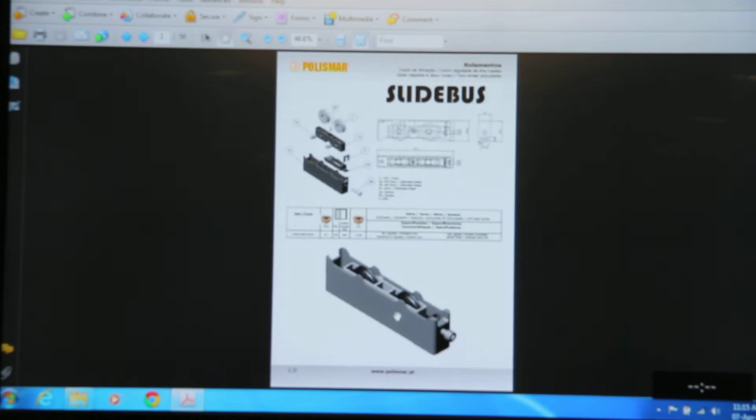Polismar is our supplier of rollers. Here we can see the dismantled roller. This is called the wheels, and this is the case, and this is the case in which this whole arrangement will be fixed.

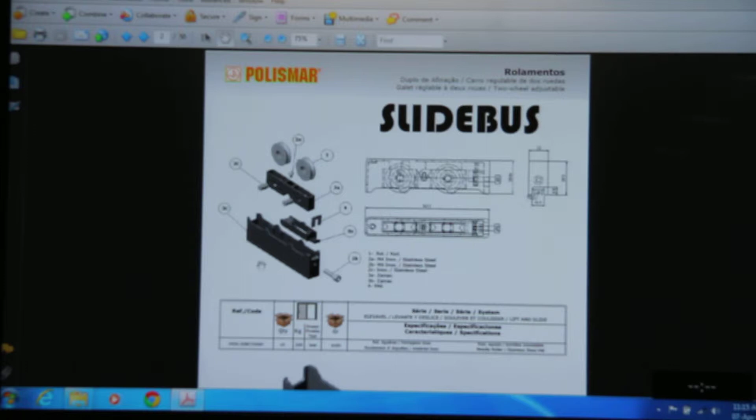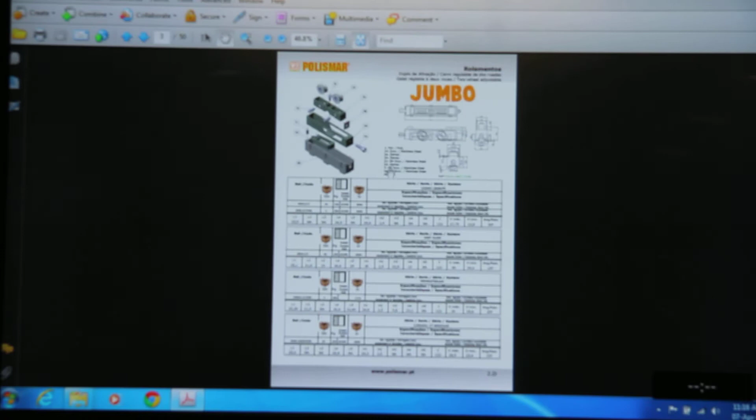Now here we can see the roller. It's a double roller because two wheels are here, so it's called a double roller. When the single wheel is there, we can say that is the single roller. So different types of materials and the specifications are here.

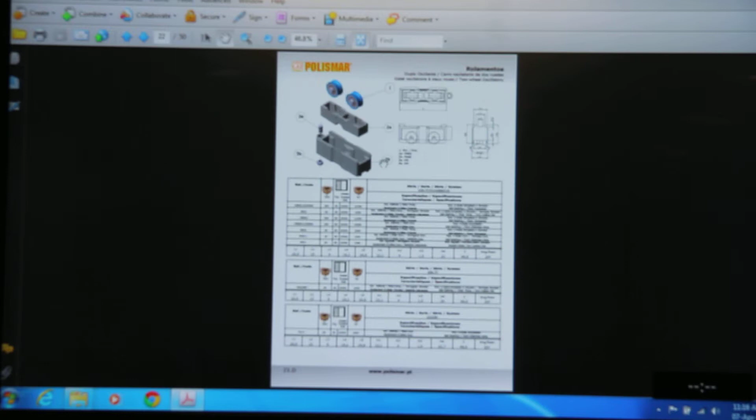Here you can see the single roller. In that only one wheel is there, and it's applicable in the sliding windows especially, and for the doors we are using the double rollers. So now let's see how we decide the roller for the specific sliding door and window.

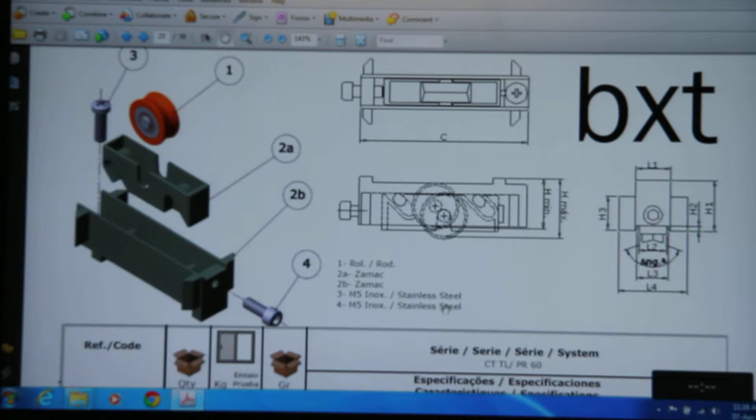This is our roller code. It depends upon the profile, which kind of profile we are using for the sliding. It shows the profile digits, and this is the material for the wheel, and this shows the type of roller, and this shows the load bearing capacity of the roller, and whether it is single or double.

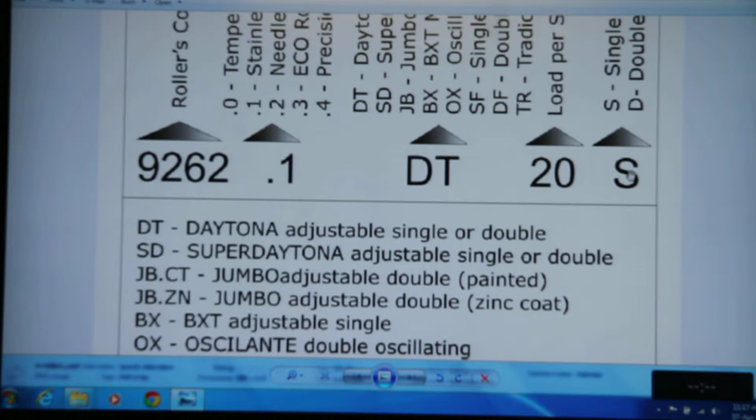Point 1 means it started from 0. There is point 0, point 1, point 2, point 3 and point 4, like that it will come. Point 0 means it's tempered. Point 1 means it's a stainless steel roller. Point 2 means needle roller. Point 3 means eco rollers.

Point 4 means precision roller. And this is the material for the roller. DT is the Daytona model. SD is the Super Daytona model. JB means the jumbo model. BX means BXT model. OX is the oscillating model. SF is single fixed model. DF is double fixed model. TR is for the traditional model.

So here is the type of rollers, and JB and BX are the bigger size rollers which we are using for the doors especially. Single fix and double fix means the roller where one wheel will be fixed or adjustable, and DF is the double wheels adjustable or fixed. Like that we differentiate the rollers.

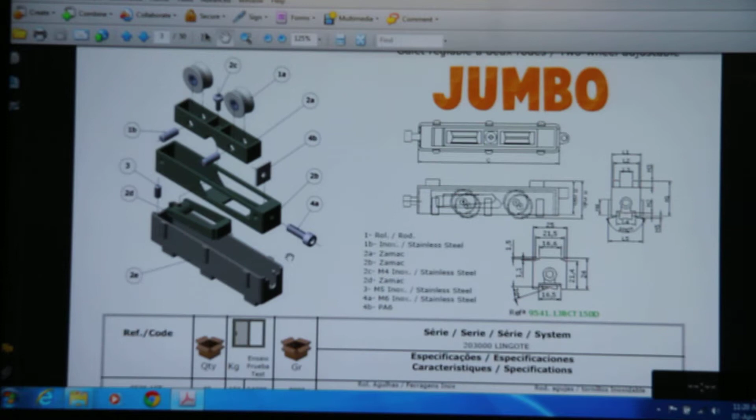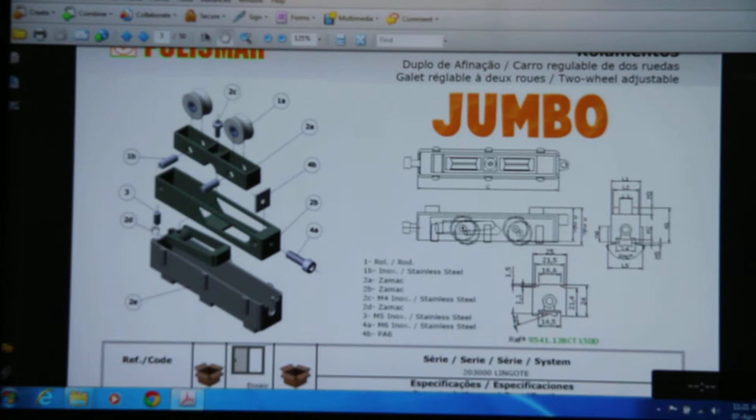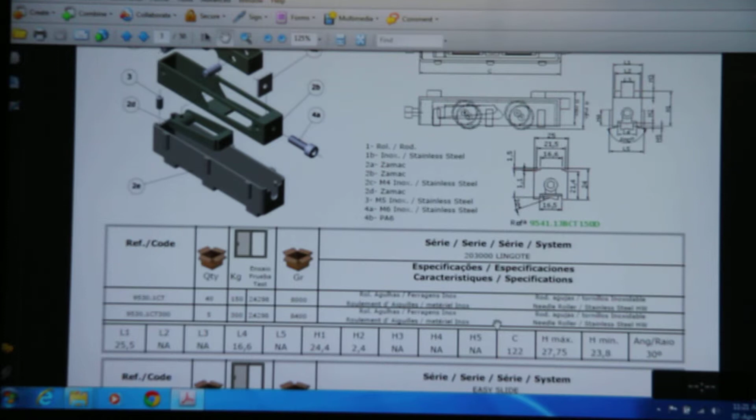Here we can see this is the stainless steel roller. This is the Zamac material case. This is another Zamac material case in which this small case will be inserted and it's screwed by these screws. And this is also another material from the Zamac, and this case will be inserted in this box and it will be fixed through these screws. The jumbo roller is for the big doors and windows, heavy windows and doors, like 150 kg, 300 kg.

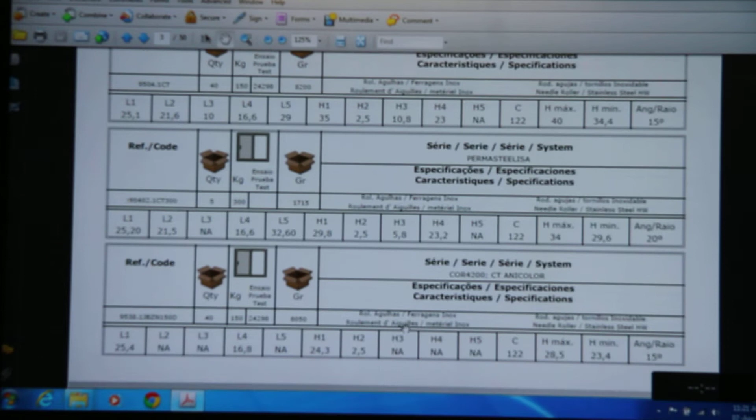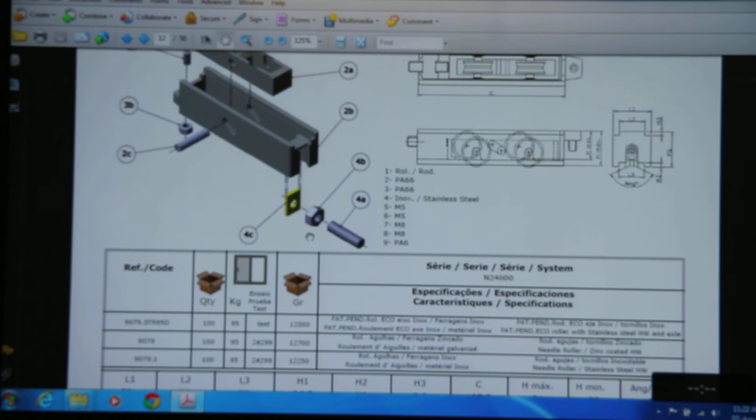Now we see the traditional rollers. It's for not too much high or not too much less in weight. So around 80 to 100 we take from this traditional.

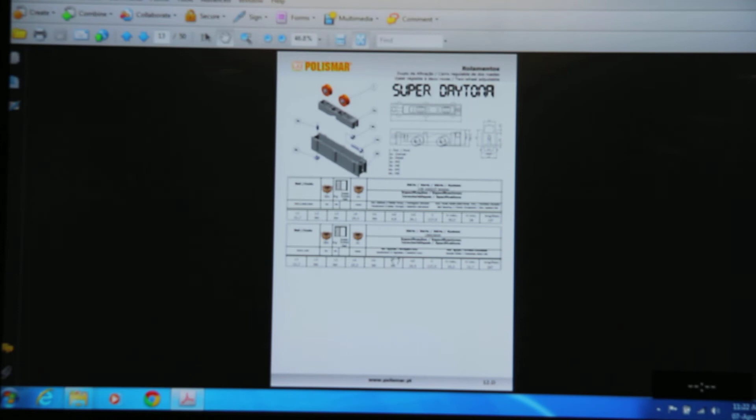This is the two wheel adjustable roller. You can adjust this roller according to your preference.

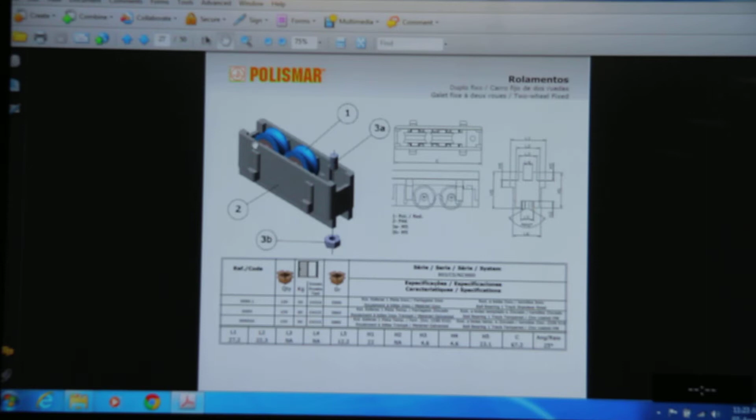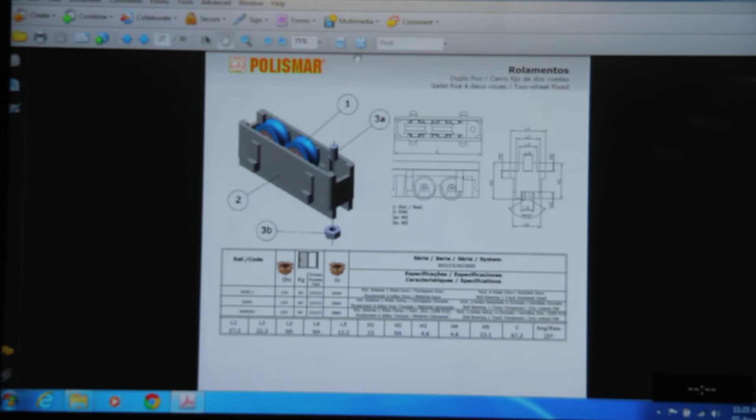This is the two wheel fixed. Here the position of the wheels is fixed. So it's applicable for special requirements in the sliding doors and windows. When you want the roller at a specific position, then you can use the fix.

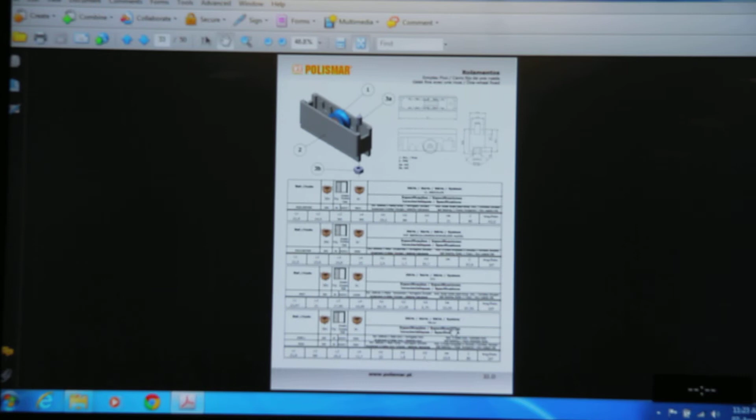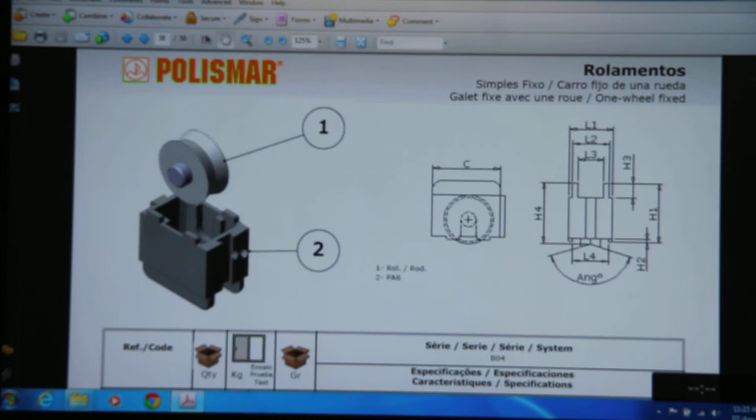Here you can see the single roller. One wheel roller is fixed in this case and it's usable for small windows like 10 kgs or 30 kgs weight, up to 10 to 30 kgs weight.

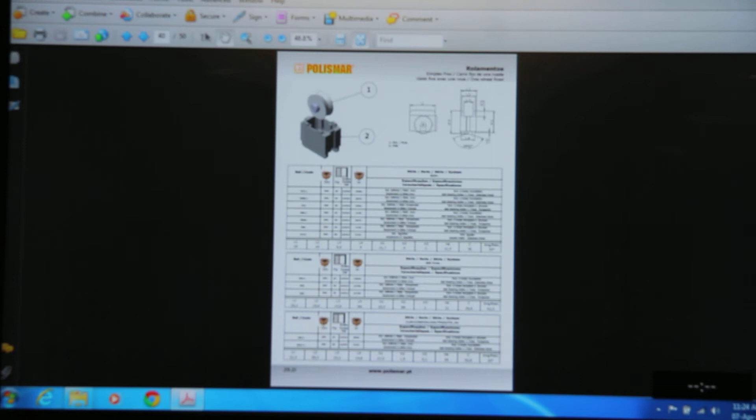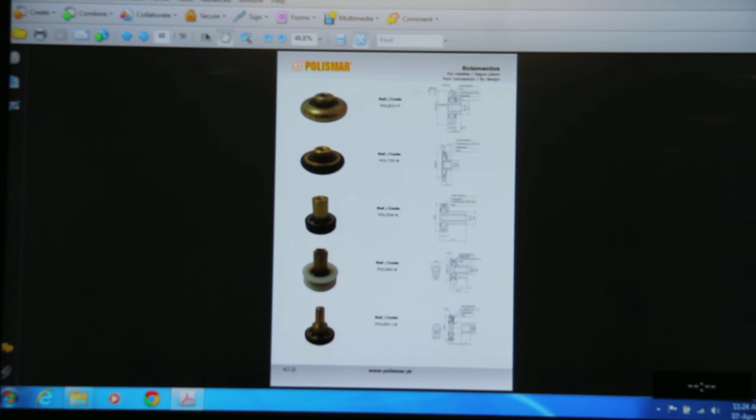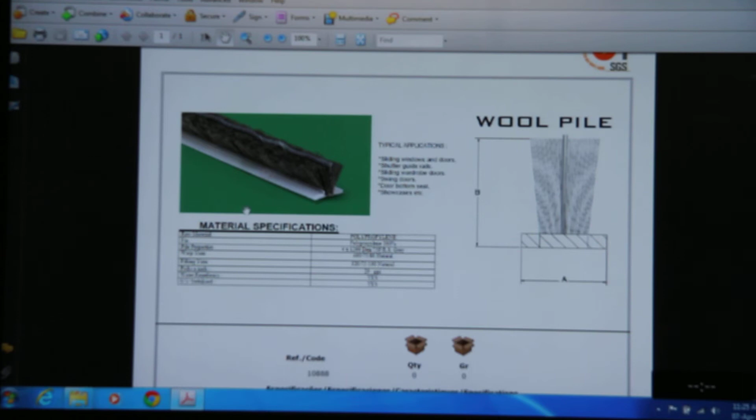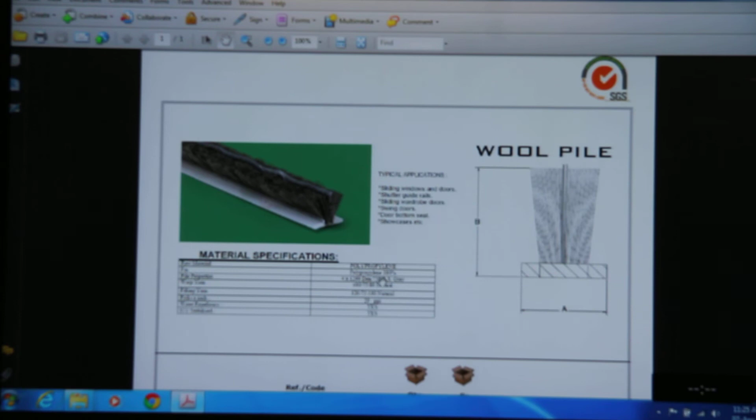Now let's see the other hardware from Polismar. This is the wool pile, and we are selecting this wool pile according to the parameters of the sliding doors and windows, and it guides the shutter of the sliding rails. It's used in the doors and bottom of the door and windows, and it's used in showcases also. So it restricts the dust and seals from the outside exterior environment. How we will apply the wool pile in the profiles we can see now.

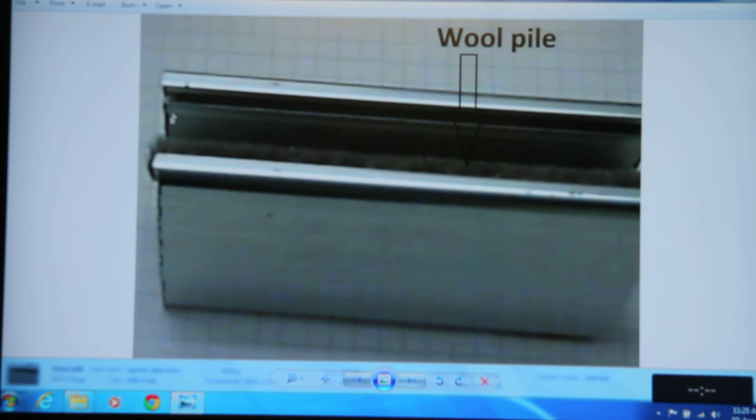So here is the position of the wool pile. Within the track you can apply this wool pile. Now let's see the other supplying elements.

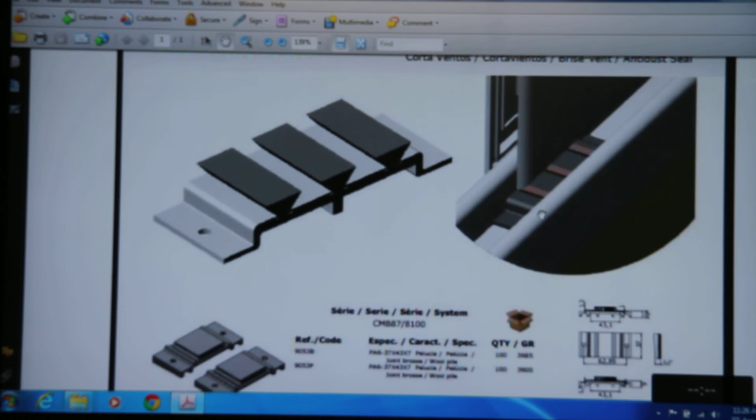This is the anti-dust seal. Anti-dust seal we are using between the two tracks, and as per the name we can recognize this. This is the material which saves the track from dust and other material from the environment, so that this track can move easily above the rail. No dust particle will put restriction on the track.

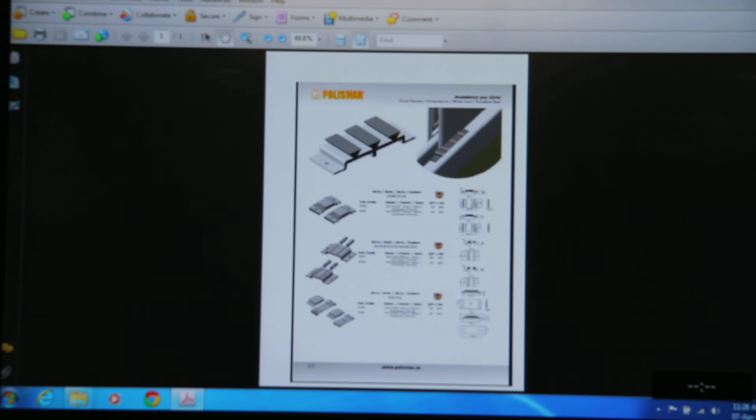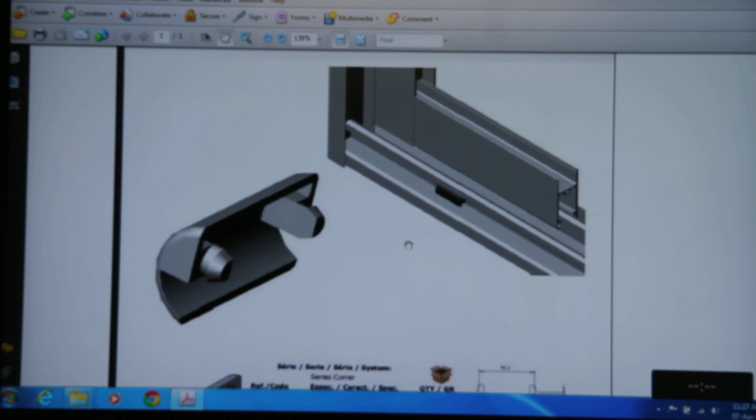This is the drainage cover. It's specially designed for the sliding series. It covers the drainage hole. By plugging out this drainage, you can remove water that is collected here, and this is for making the aesthetic view clear, so you can hide your hole once you require to hide it, and you can remove it, and after that the water will drain from this area, and it is used in sliding only.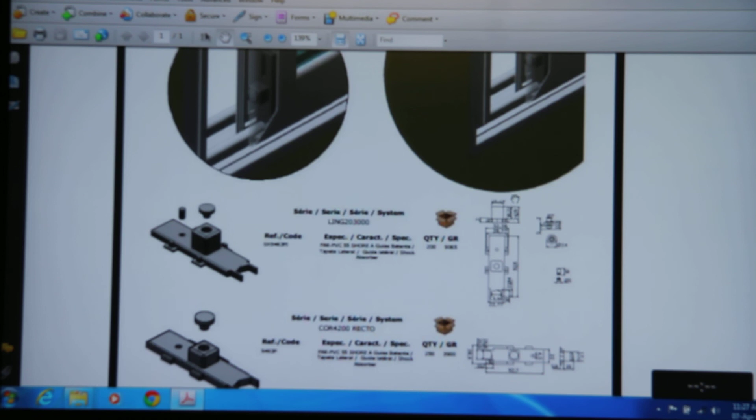This is the shock absorber. Shock absorber we are using at the corner side of the sliding windows and door. Once you close the doors, it will stuck with the frame, and it will make the sliding accessories rest. It protects the sash from the reversible impact from the frame at the closing time.